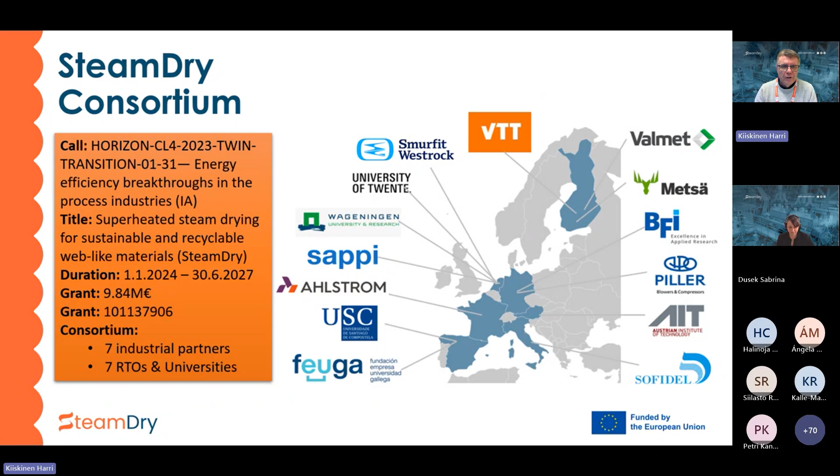But at that time we didn't really know what happens when we put paper in this kind of steam dryer, so we were mainly focusing on the quality effects, what happens to paper, and also the drying rate, how much water can be evaporated with this technology. We already then noticed some technical challenges which were not solved at that time, because it was all about making paper machines bigger and faster, and implementing this type of new technology didn't really fit that world, so I guess we were a bit early.

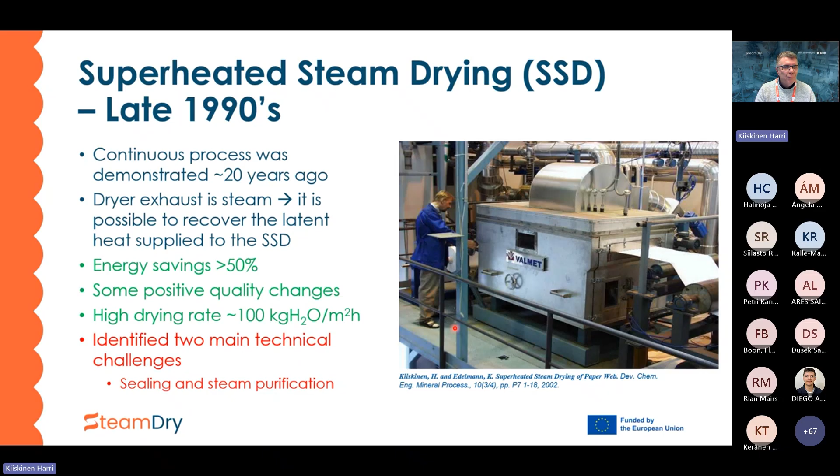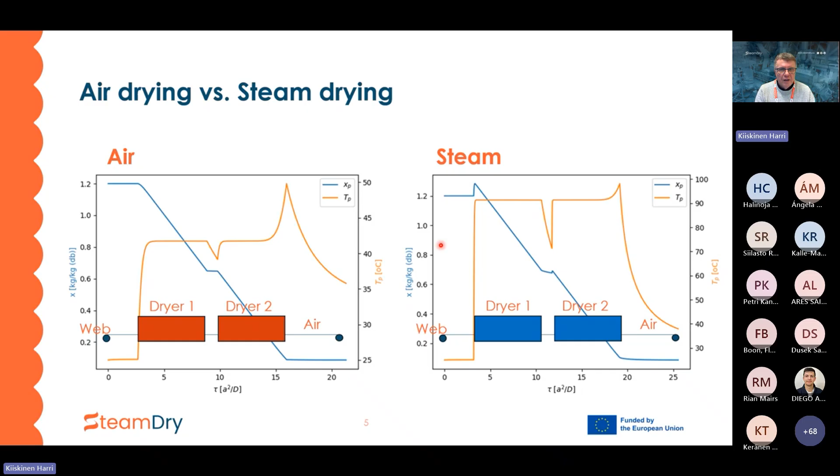So what we are actually doing here: we have set the goal. We really want to demonstrate this kind of drying technology which radically reduces the energy consumption. In addition, it also reduces the CO2 emissions, since we are not really burning anything to get the drying medium there. We are electrically heating the steam, and in the next presentations you will hear how that happens. In our proposal, we stated that the energy savings potential is 60%, and during this first year and a half of running the project, we have seen that it could be a lot higher. In thermal drying, depending on the machine configuration on the production line, we are somewhere around 40% savings, and totally 100% reduction in CO2 emissions.

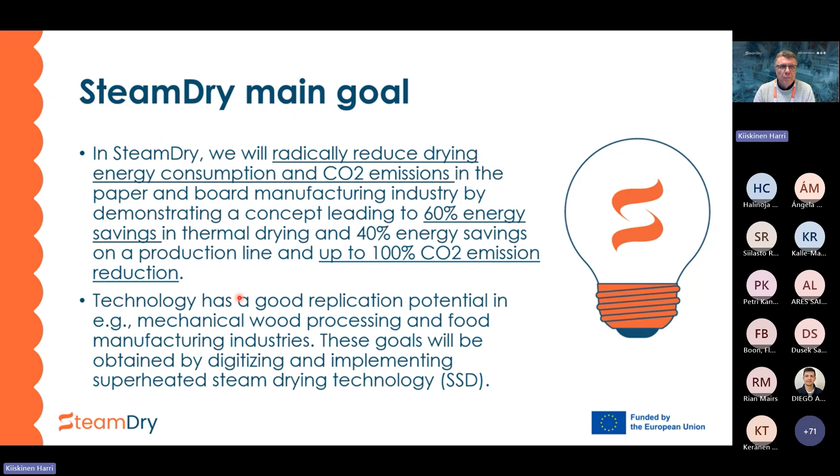This project is really focusing on the pulp and paper industry, but there are many other industries where this can be applied. Whenever you have this kind of a web-like product, it could be a textile web, non-woven, wood, plies, anything, this technology can also be implemented there.

So we have set a set of objectives for us. Like I already mentioned, develop this energy efficient drying technology, achieving a CO2 emission-free process. The process is quite different, obviously, since it is using steam as a drying medium. So we need advanced control systems, and we are working on those too. And a big part of this exercise is to pilot something, and I will come to this pilot a bit later, but really show on a real machine, or on a pilot machine, that it works.

Always when we are thinking and developing new technologies, these environmental and techno-economic assessments are very important. So one work package is really focusing on those. We will hear about those later today.

And finally, when having all this, of course, before making any investment decisions, this business potential really has to be there. So that is also one big exercise. And finally, what we are doing today, we are really telling the results. So we are always focusing on communication, dissemination, that kind of thing. So those are the objectives we have.

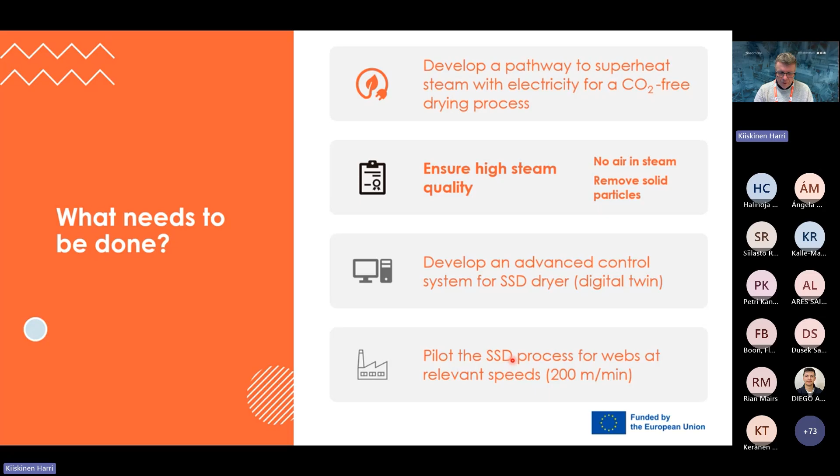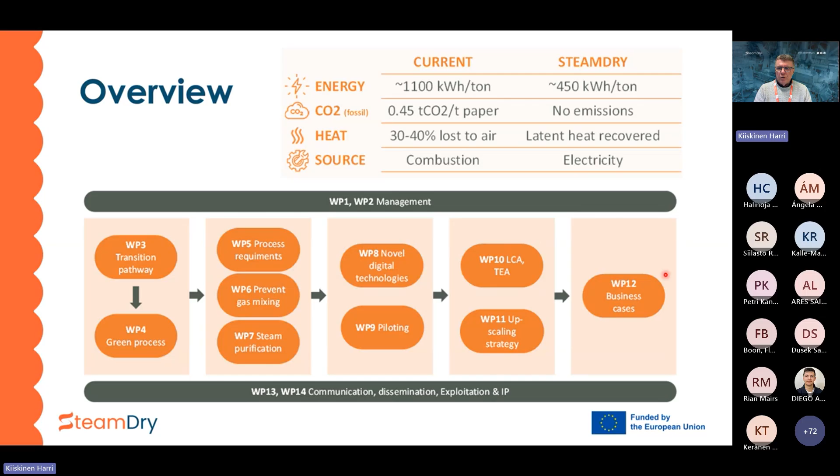And now we are actually working on these technical questions, first at lab scale and shortly at pilot scale. And parallel to that, developing these control systems. And when we start to have data from the laboratory and pilot scale studies, then we can really update and start to calculate these LCA and techno-economic assessments. And then we know a lot more about the actual machine solutions, sealing solutions, so the upscaling strategy can be built. And finally, all this data will be fed into the business case calculations, and that will be the base for further steps, investment decisions, that kind of thing.

So we are basically burning some natural gas or some gas there, and then impinging those hot air and flue gases on the material to be dried. Or another version is that we can use this through-air drying if the material is porous.

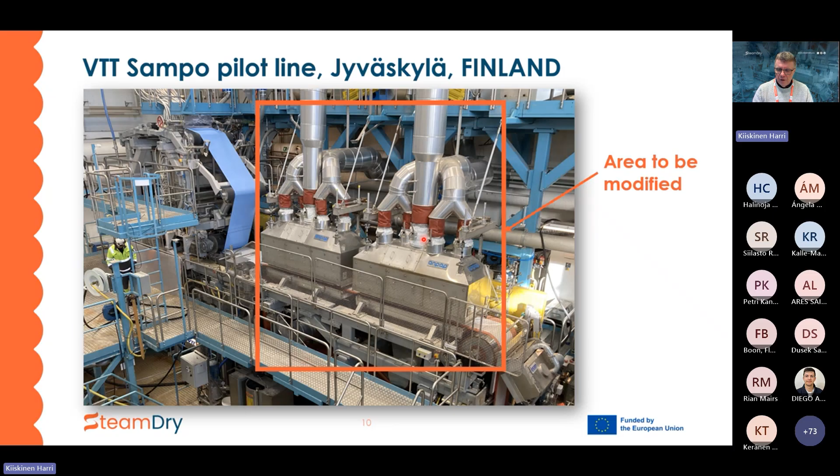And then when having this savings potential, we can estimate what would be the savings if this technology is implemented on some percentage of these machines, for example. And similarly, for these CO2 emissions from fossil sources, the values are there today, so we can also estimate how much reduction we can gain there.

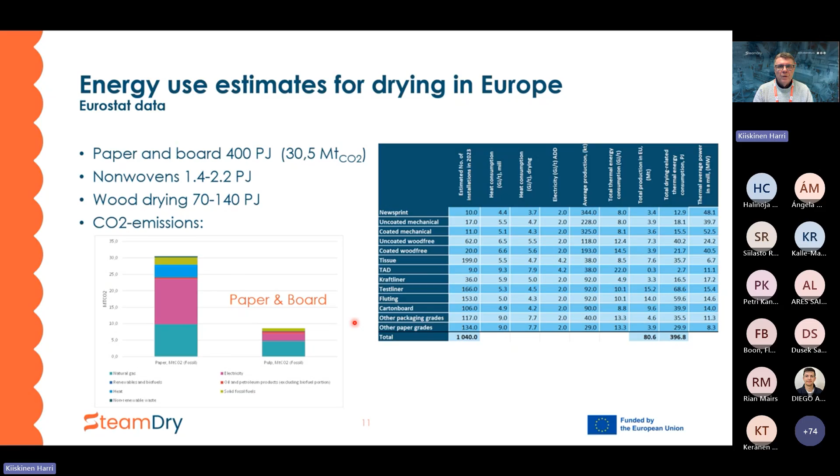We have also checked where those machines actually are, and since this dryer is actually producing steam, basically our dryer is like a steam generator, so there has to be some usage for that steam. It could be the same machine, some cylinders which are already there, but it could be also some other process.

So we went through, and again this is public data, all kinds of European industrial sites, where they are actually located, and how much emissions they are producing today, just to see where this surplus steam could be used either on site or at some site nearby. This data set is also collected from public sources, and it contains 2,000 European sites, and if somebody is interested, we can share this data set.

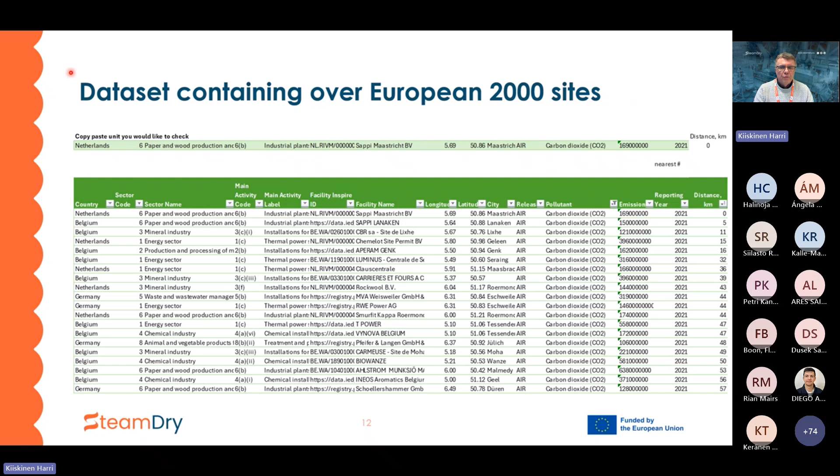It could be whatever, 1,000 meters per minute or even higher. There are many machines running a lot faster, 1,500 meters per minute. And Valmet is now our partner in this project, so it could be on their pilot, but it could also be some industrial machine. We don't know that yet.

Typically this kind of development takes some years, following this lab work which has been there for a long time. But then after this piloting phase, a couple of years in some kind of demonstration, and then finally really entering industrial markets. But we will hear about those later very shortly. And this roadmap of the superheated steam transition is one of our public deliverables, so when you go to the website of this project, you can find the document there.